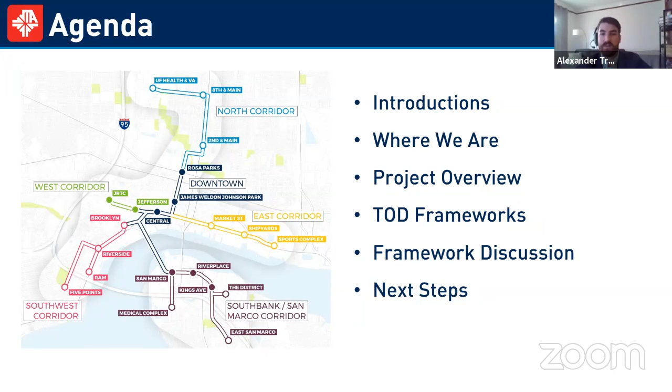We just want to give you a brief background of the status of the project and what we've done to date and where we're going. Then we'll dive into some of the frameworks that we've discussed and come up with as a team, and get your feedback and thoughts on what you think should be in these frameworks. From there, we'll cover the next steps of the project and give you an update on the timeline.

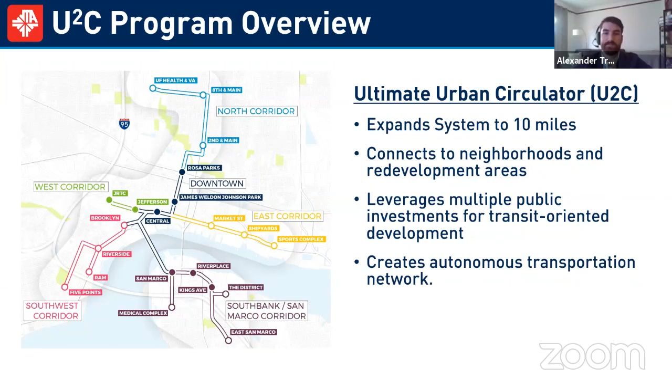As we dive into these frameworks, we really want you to consider what is TOD, or transit-oriented development, and think about all the features that make a TOD. TODs are a mixture of housing, office, retail, and other amenities that create a live, work, and play environment. It's a more sustainable form of development, focusing on infill development, as well as creating a safe environment for all travelers, including those walking or biking, as well as transit users. So we'll talk about accessibility, mobility, and sustainability.

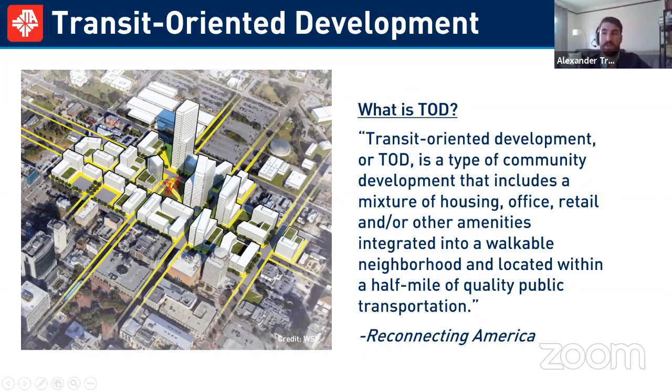All of these stations are surrounding proposed U2C stations. These have been developed in high-level planning exercises and are not definite station locations. If there are any other questions related to the specifics of the U2C program, for the sake of time tonight, since we'll be doing a lot of sketching and planning related to the station areas, we ask that you visit our project page at u2ctod.jtafla.com, and under the resources tab you can find frequently asked questions, which should answer a number of your questions. If you have any further questions, feel free to reach out, but I will do my best to address them in a timely manner tonight.

The purpose of this is really to improve mobility. Transit-oriented development has the opportunity to create more accessible areas for all users by creating nodes throughout the transit network. This will also lead to development of the economy or economic opportunity in the area, allowing this community to be more sustainable and support itself as well as the transit system, leading to a more financially sustainable form of development for the city and JTA.

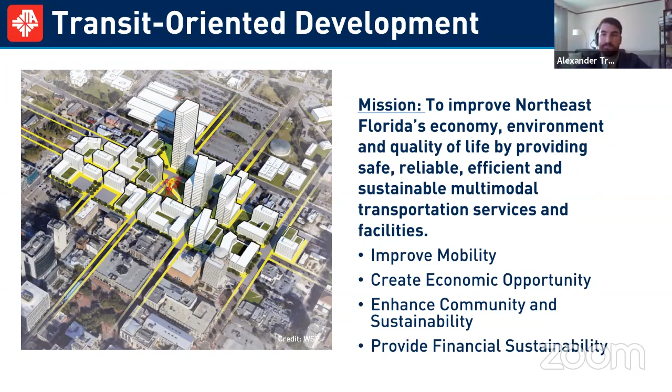Okay, great. Thank you, Zan, for that introduction. Again, I'm Josh Turner, the urban designer on the team. So tonight, the main focus of our discussion and our engagement will be

for our TOD frameworks that we've created for 6 stations. Tonight we're talking about Shipyards, Rosa Parks, and JRTC. How this will go is we'll talk about each station individually, first talking about the framework itself, which we've broken down into 3 pieces or 3 layers. The first layer is circulation.

The second, we layer on the open space network and public realm discussion. The third layer, we bring it all together within a transit-oriented development framework. You can't really begin to realize where possible development is going to go unless you understand the concept and priorities for circulation, connectivity, and also your public realm and open space.

After talking about the framework and breaking it down into that detail, we'll show some examples, precedent imagery that represent best practices for different approaches to TOD development, or specifically to the framework. So precedents as they relate to public realm and open space, and then also the type of development that we think could be appropriate for these different station areas.

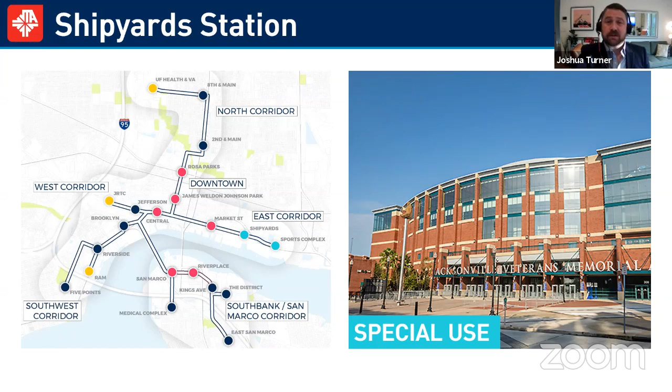Private land or parcels in private ownership could certainly be considered for TOD, but usually publicly owned parcels are something that can prove beneficial as far as getting projects off the ground.

We also note that the Shipyard station area does have some environmental issues, and this could be also the reason why this very valuable piece of waterfront has yet to be developed. So it's something that we acknowledge, and it's part of the narrative that we're building for this station area.

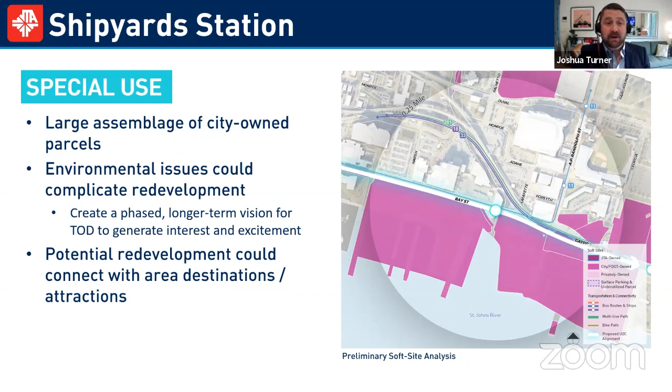And also, this station area provides a critical link between the sports complex to the east and also the downtown area to the west. So it's not only a very valuable piece of waterfront, but also provides that critical east-west link as part of the downtown story.

Some of the design principles that are important to this framework for circulation: first, really realizing what an asset this could be in the greater context of the Jacksonville Riverwalk network. We believe that any plan, be it parks and development, should absolutely emphasize and prioritize a generous pedestrian-only promenade right at the waterfront, and that goes a long way to reinforcing that east-west connection between the sports complex and downtown.

In addition to that, you want to be able to connect to the shipyard's waterfront, and connect to the park if there's going to be a large destination waterfront park there, which we think makes a lot of sense for something like that to go here. So creating and reinforcing those connections upland is very important, and we think these are pedestrian connections.

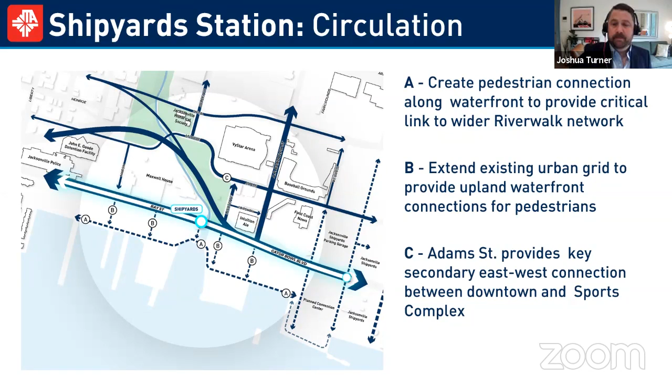So layering on top of our circulation framework, I want to talk about the open space network, really building upon that connectivity and also adding important places for, most importantly for this station area, new places to recreate.

So with A, again, we think that along the waterfront there should be a generous waterfront promenade. You can think of this as being 50, 60 feet wide, perhaps in some places even wider. But really it's more than just a waterfront trail—it's an entire, you could think of it as a linear park along the waterfront.

Here is the whole story of connecting to the Emerald Trail and Hogan's Creek. We think that's a really exciting connection that starts to not only land Shipyard Station within the context of downtown, but really Shipyard Station within the region, providing a regional connection via open space to the waterfront. Connecting to the Emerald Trail, we think, is absolutely critical, and it plays an important role in our ideas for this station area.

Then you've heard me mention the idea for park space at the waterfront. We think that's extremely important. There seems to be a lot of opportunity to provide a significant signature open space at the waterfront to really capitalize on that access to the water, and also just provide Jacksonville with a high caliber, high quality open space. We think that can take a lot of forms.

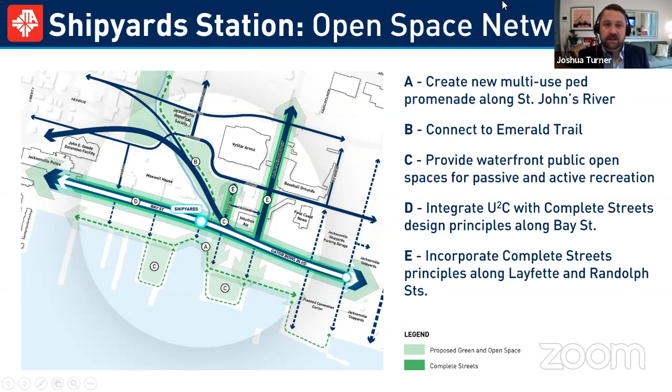Finally, here on the open space network is E, incorporate complete streets principles along Lafayette and Randolph. Again, that supports the idea of the upland connection. So not just the intersection at Bay Street, but think about attending an event at VyStar Arena or going to a baseball game. If there's somewhere to go at the waterfront, you want your experience along Randolph or Lafayette to really support an enjoyable, safe, and optimized realm for the public to circulate between the waterfront and these destinations to the north.

So we talked about circulation. We layered on our ideas for open space, the public realm, and that sets the stage for: are there opportunities for there to be development associated with a premium mode of transportation coming into this area and along Bay Street? The whole idea with TOD is really leveraging that investment in transportation infrastructure, and they both work together to put forward an idea of walkability, transit-connected places that also have a compact and sustainable approach to development.

Just to run down a couple of the ideas here that we have for Shipyards. You'll see A here. So we still have everything in place. We have the large waterfront promenade, and the high caliber destination waterfront spaces just to the south of that. We think that associated with this new open space, we could be very strategic with development and create a mixed use waterfront district that's integrated with this new park.

Right now in this scenario, we're showing, in this darker red, two new pads, if you will, or two new parcels for mixed-use development, and we think it should probably be multifamily residential. Maybe it's a hotel that complements a proposed or possible new convention center in the area. But really, you can think about the ground floors and maybe multiple levels being terraced and really opening up to the water.

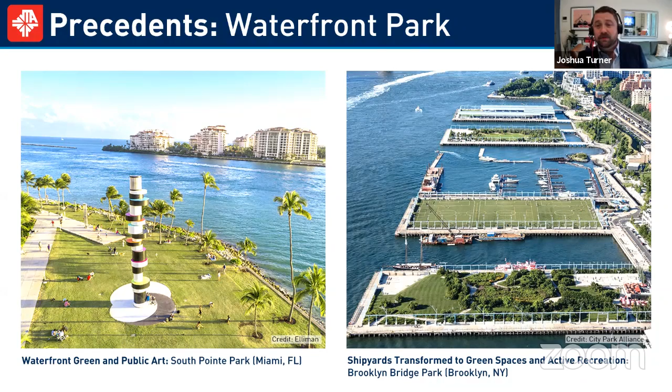So we talked about what our ideas were for a new park at the waterfront. We think it's something that should be high caliber, something that garners national attention, and also has high quality and very good landscape design.

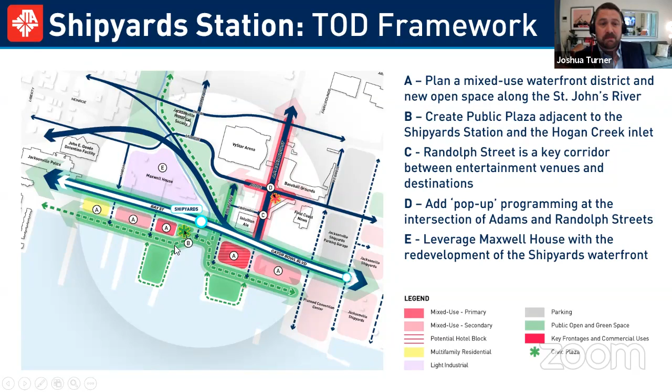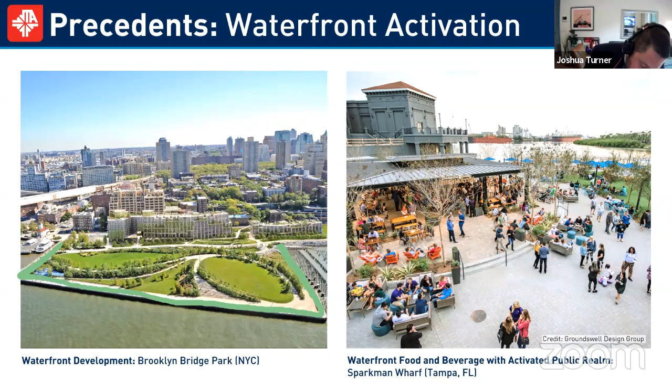This development was built in conjunction with the park. There's a hotel here at the end, and then these are residences. This is one way development can be very strategic, integrated very seamlessly with new open spaces like at Brooklyn Bridge Park. But maybe most importantly, these buildings are actually paying for a good portion of maintaining this park, and understanding where those funding streams come from is very important.

So we think it's a very interesting precedent. We also like the fact that it doesn't have to be towers at the waterfront. I think these range in height maybe up to 10 stories. So development done right can live very nicely among new open space at the waterfront.

The image on the right here is in Tampa, this is Sparkman Wharf. So if you think about the waterfront promenade and how different things could be going on, you can think of this building as being part of that development program. You have restaurants and bars and kind of the activation opening up to, in our case, that promenade space. We think this type of activation is meaningful; it gives a lot of different opportunities for what you can do at the waterfront.

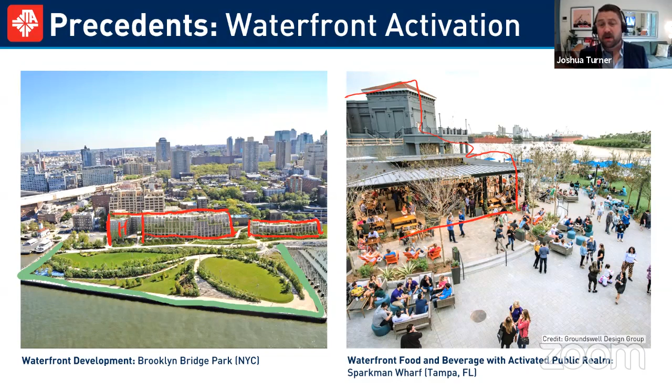Maybe that's a little bit different story than what's happening at Metropolitan Park. So that was our primary discussion for Shipyards, or at least the discussion of the frameworks. Before getting into this aerial and dropping on some of those elements, I wanted to open it up and check in with Zan to see if we had any questions or comments come in about the frameworks about Shipyards.

Sure thing, Josh. So I saw a couple come in regarding zoning in the area. The DIA and the city worked recently to approve the new downtown overlay, which really helps simplify the zoning, and a lot of the features within that zoning overlay are actually really supportive of TOD. So we are comfortable with the zoning in this area for all of the things that we are proposing in this vision.

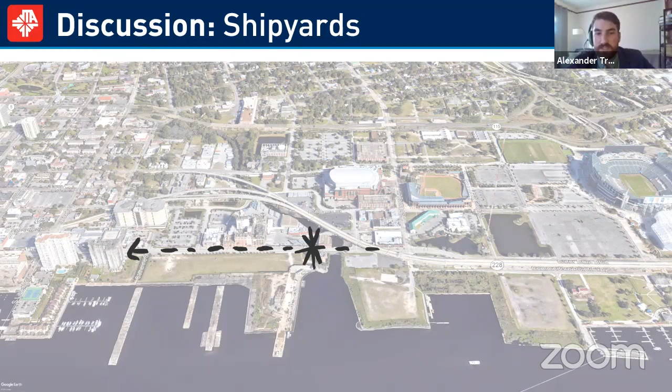As you start drawing that network there, Josh, some of the questions include connecting the Riverwalk that exists along the north bank through the Shipyards area to the stadium. Can you touch on the promenade and how that would connect? Yeah, absolutely. It's one of the first things we thought of when thinking about this station area. It's one of the most important ways this area helps fill in the missing piece of connectivity between what sometimes feels really far to the east, which is the sports complex, and of course downtown.

So I'll actually sketch in that waterfront promenade here. What I did was drop in, as Zan was talking, the planned U2C alignment along Bay Street. I indicated here at this asterisk the planned station at Shipyards, and I also dropped in the idea of some station being integrated with future development at the stadium. And just to touch on that, Josh, real quick.

So, yes, utilizing Bay Street, but the actual route into the stadium area is being designed currently. Again, this is just a planning level sketch of that area.

So the green line I'm drawing now traces the waterfront, but the idea here is that on either end, however ultimately the parcels around the stadium are developed, we believe there should be a waterfront connection connecting in with the existing Riverwalk network, both to the west.

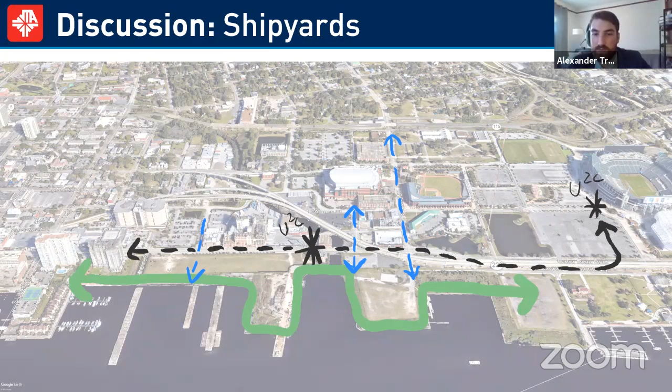So addressing these parks, they aren't really there to work as a swap for Met Park. This vision is really just determining what we feel is a good use for the area as it relates to transit-oriented development. And again, more park space is actually beneficial for the waterfront, helping with a lot of the resiliency issues that the city is facing currently.

Yep, that's right. So you can think of the new spaces at Shipyard Waterfront to be among the collection of open spaces throughout Jacksonville. Most immediate would be Met Park here. So it would be building upon the open space network within Jacksonville.

And of course, the Emerald Trail and Hogan Creek, as I was talking about earlier, that connection plays an important role with our planned station area, but then also connecting you to that waterfront.

Something else I just dropped in, these blue arrows are those upland connections. So dropping in one along Randolph, connecting the baseball stadium, VyStar Arena, Intuition Ale, providing that connection to the waterfront. We also think Lafayette, just to the west, is an important one. And then also just other areas to connect to the waterfront to the west. So we have one along Market, and then also maybe adding one that's more closely associated with Maxwell House.

So dropping in here, what I want to do is highlight where this new park should be. And again, we're very early on in the planning, and what we want to put forward as part of our vision is to help guide the discussion of how the vision for Shipyards takes place.

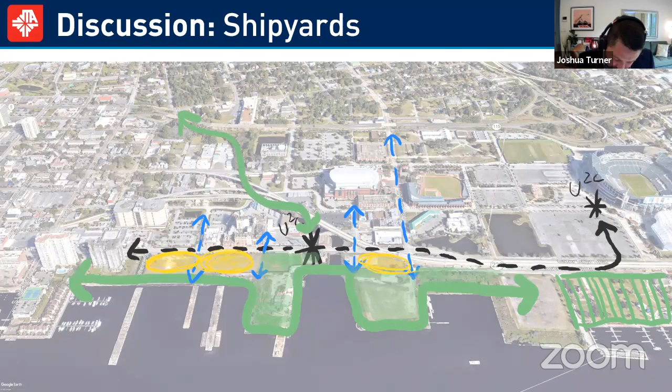So we have kind of VyStar Arena, we have the baseball grounds, we have Intuition Ale Works, we also have the stadium over here, and actually, to a bigger degree, really sports complex. And then also downtown to the west. And as you can see, Shipyard Station falls really right in between here and is really key.

I want to point out a couple other things because it's a part of the neighborhood. So we have the detention center here. And as part of our planning process, we don't think that's going anywhere. It may, but for our purposes, it's living within the context of the planning work that we're looking at for Shipyards.

And then we also have, I believe that building now is down, but are there, just to extend, is there an opportunity here? And then also maybe adjacent to Maxwell House, to maybe push the idea of some of this development to occur north of Bay Street.

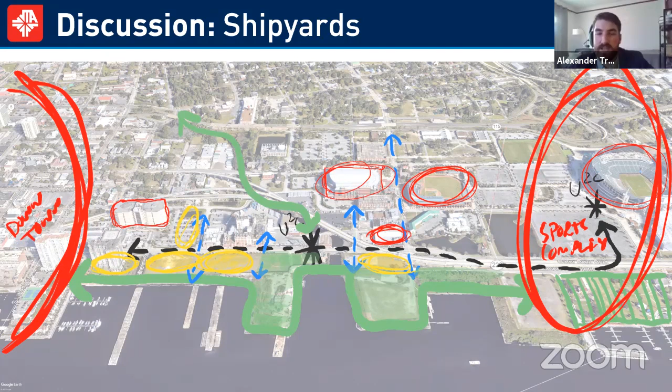You highlighted a lot of the kind of connecting areas there. So Shipyards, in a sense, is sort of a transitional zone between a highly focused entertainment area and the traditional urban core downtown. What kind of features can we include in this plan that will act as that transition zone, but also make it a destination in itself?

I think we don't have to come out and say Shipyard should be an entertainment destination for the region, but it can have elements that act as a draw. We think there's a real opportunity to complement, even before the sports complex gets fully built out, the existing entertainment amenities in this area—the stadium, the arena, the baseball grounds—we think those are destinations in themselves.

So could these yellow circles be mixed use development with restaurants and bars that could complement people coming to a game or an event? Is there an opportunity to keep them in the neighborhood, whereas normally they might immediately leave once the event or game was over? Is there an opportunity to, before or after the game, walk down Randolph, walk down Lafayette, and all of a sudden you're in this new waterfront place?

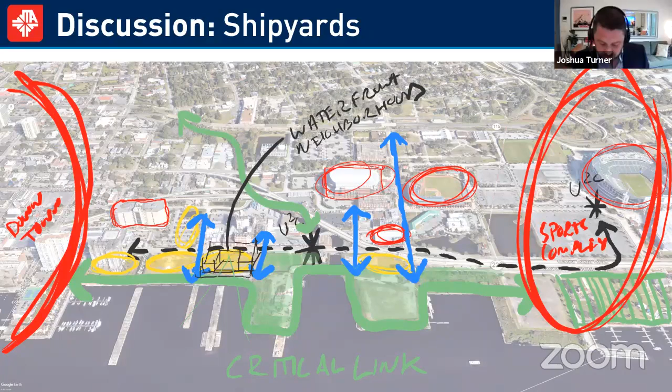Really key to thinking about Rosa Parks Station and our thinking for transit-oriented development are the First Baptist parcels. We have one of the older auditoriums here on the left, and their parking garages. So really, the future of those parcels and how they play into a new vision for the Rosa Parks Station is important.

As a topology, Rosa Parks is just north of downtown and certainly part of the central business district. But when we were assigning the topology, we weren't necessarily thinking about what it is today, but maybe what it could be in the future, when you have the expansion and transformation of the Skyway to the U2C. So we think it has an opportunity to be a high intensity urban center that's really acting as an anchor for the north part of downtown.

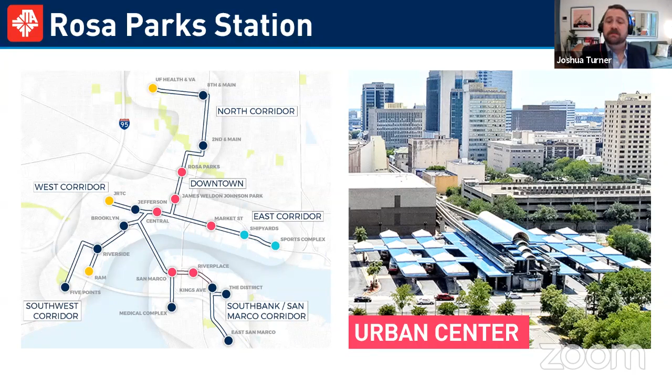So when we think about Rosa Parks, what could it ultimately look like in, let's say, 15 years? But you have to start somewhere, and we think the parcel actually owned by JTA is quite large. It's where the station is, so we asked the question: could this be a phase one project that could be catalytic for the larger station area, and really help inform and set the tone for how the Rosa Parks station can be fully realized.

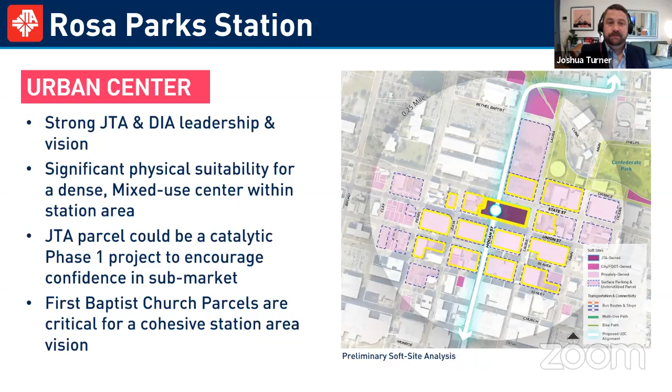Similar to how we did with Shipyards, we'll talk about Rosa Parks Station in its three layers. So first here for circulation, with State Street and Union Street - these are really important corridors to get people in and out of downtown. So we don't see that changing, but what we would like to see is, in and around the station area, are there ways we can introduce traffic calming measures to promote pedestrian safety and circulation?

If we're wanting to create a new place here where one does not exist now, this is one of the things we always ensure is part of the planning process. At least the idea is put out there for discussion with the hopes that it can gain some traction. So we think that's definitely very important right in the immediate station area, getting people from the station to points south or even points north.

With Hogan Street, this corridor, we really like the ideas being put forward by the DIA for this being a corridor of local restaurants and bars, and really being a place where people go. So you can think of downtown not just as a 9 to 5, but maybe it could be an 18-hour district. You've heard of a 24-hour district, so maybe this is an 18-hour district where people are staying through the evening or even on the weekends, coming and visiting and patronizing restaurants and bars that make a name for themselves downtown.

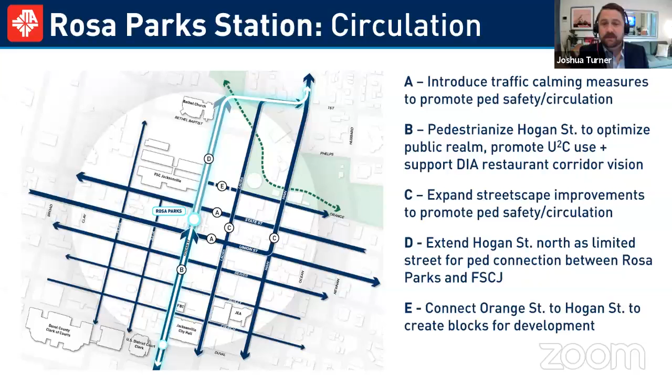Well, this is more about the experience—so adding enhanced lighting, maybe benches, trash cans, places for bicycle lanes and bicycle stations. All of those come together to really reinforce and optimize the experience for the pedestrian.

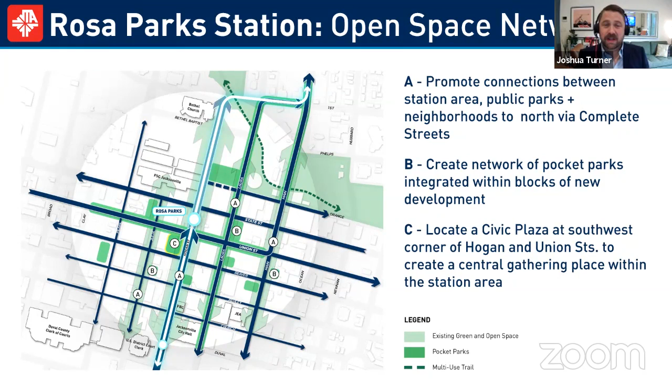So among all the stations we're looking at, certainly Rosa Parks is, I would say, the most intense. Also, I think the one that has the longest time horizon as far as fully realizing the vision of what the station area could be. But we do think there's real near-term opportunity in those blocks right around the station, actually on the station, and then of course the First Baptist blocks.

Perhaps there's an opportunity to have another hotel downtown. It would be great to have some more options to stay. The Omni and the Hyatt are great, but it would be great to have different options throughout the downtown area when visiting.

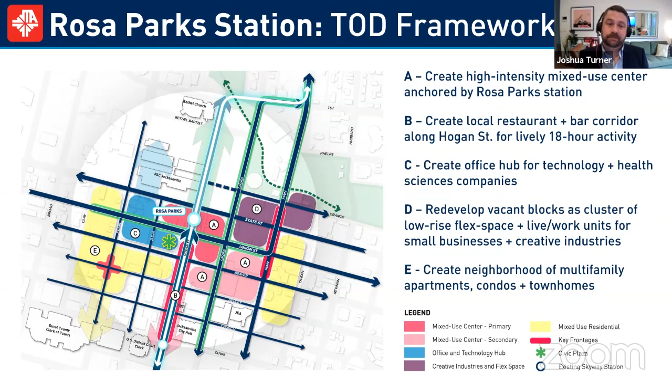So what does some of this stuff look like? We look to Florida, specifically Miami, also Tampa.

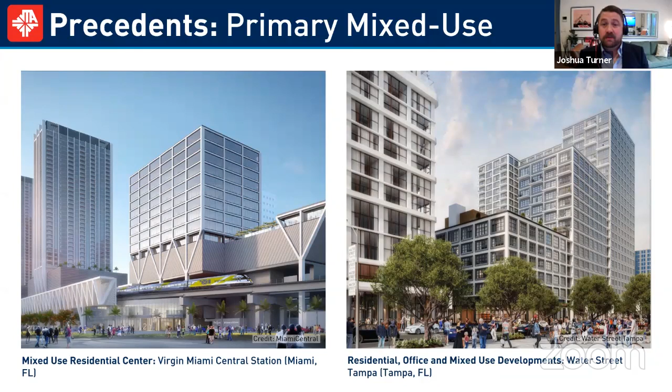I also want to point out, the planning for this new neighborhood does a great job optimizing the public realm, merging it and making it a place for the pedestrian alongside this new development, so it all coexists. It really makes for a nice place, and these images speak directly to that.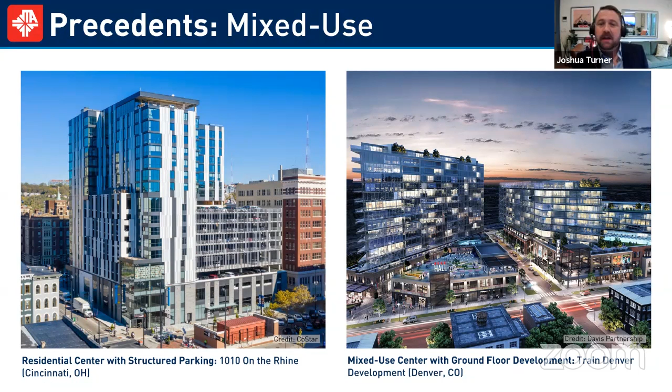The image on the right is a bit more mixed use—whereas the building on the left is residential, this has activated ground floors. Imagine this at the Rosa Parks station: the station is perhaps back here, or maybe coming right through, and so it's that more intense mixed use development, the culmination of that Hogan Street or downtown restaurant scene—really a place to go, and anchoring the station itself.

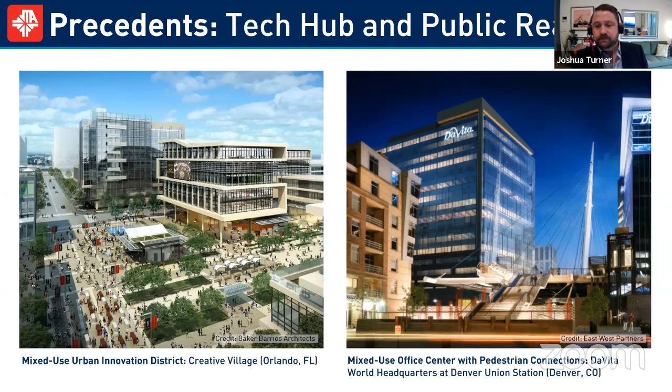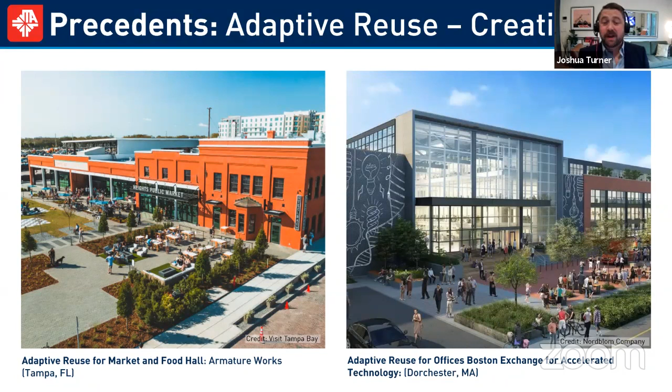Over here on the right, again, it's a building that's been adaptively reused, this time for offices. So when we're thinking about creative office spaces and live-work environments, it doesn't all have to be new construction. It can be creatively, or strategically, reimagining existing buildings.

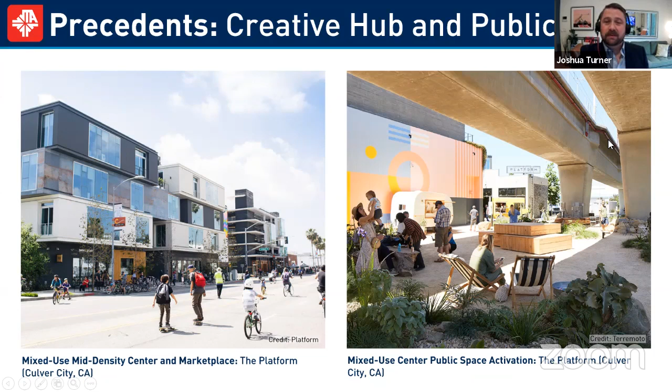As you can see here, still in Culver City, you can think about how, if this was the Skyway above, or what will be the U2C, this space below could be activated. If Hogan Street is pedestrianized, with restaurants and bars mixing with maybe a landscape or open space network, I think it makes it really dynamic with this transportation infrastructure.

So before we get into sketching some of these ideas over Rosa Parks, I want to check back in with Zan and take a look at any comments or questions we've had come in.

Not many coming in, so I'll take this opportunity, as you start to draw the mobility network, to open this up to any participants on the meeting right now: if you were to live down here or in downtown, what features do you feel are missing, and what do you think are essential services to making this a place you would want to go? You can enter those in the comment box on the right or below your video, or on the map question for the Rosa Parks Transit Center.

All right, as those come in, I'm dropping in some of the elements here. So obviously I dropped in the Rosa Parks station. We have the existing alignment going south along the Hogan corridor, and then the new alignment going north along Hogan and connecting into Springfield up on First.

What I want to do in this one is go through and outline a couple of the key features here in the station area. We have currently the JEA building over here, an important local landmark. We also have the First Baptist Church, and this block, as the discussions are going now, will be remaining and serving the First Baptist folks. We also have an apartment building over here, and I might not get every single one, but I'm going to point out the ones that pop out as part of the station area design.

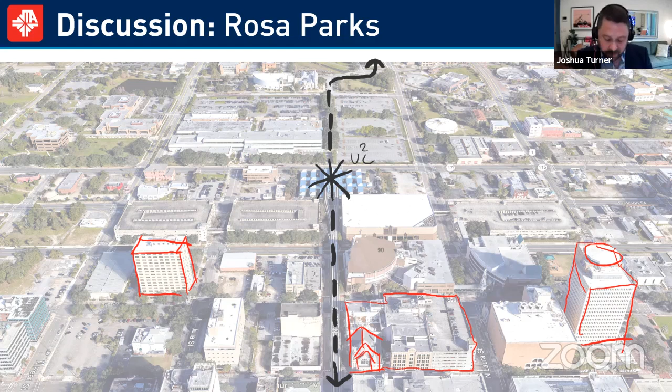We also have the university up here. Now I want to point out, well, actually I think what I'll do first is talk about the streets.

We have Main Street over here, let me get a little bit thicker of a pen. It's an important corridor connecting the station area to points northward, Springfield. A little closer in, we have Laura here, providing a direct connection to the waterfront.

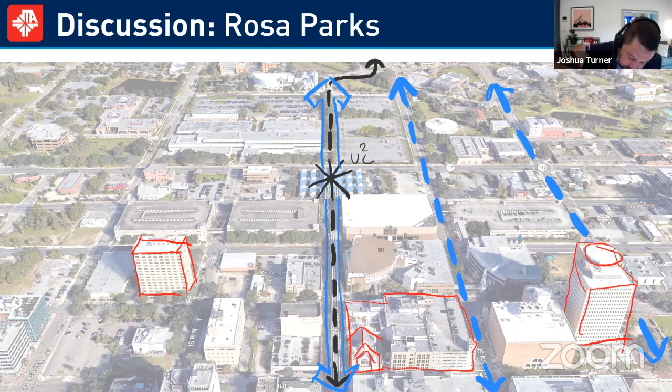Of course, we have Hogan Street, playing a central role in our station area. And then the idea of extending Hogan Street and really creating a multimodal corridor. And then we have Julia here, which is another—whoops.

So this is the process as we create our frameworks. The first thing we do is start tracing out what's existing now, what's critical, and what's the hierarchy of circulation within the station area.

So I'm going to drop in State Street. And then we have Union. Zan, did I get those reversed, or did I get them right? I think you got them.

Okay, so now we've illuminated our grid here, and I want to talk about the idea of complete streets and an enhanced public realm, which is very important as this station area comes into play.

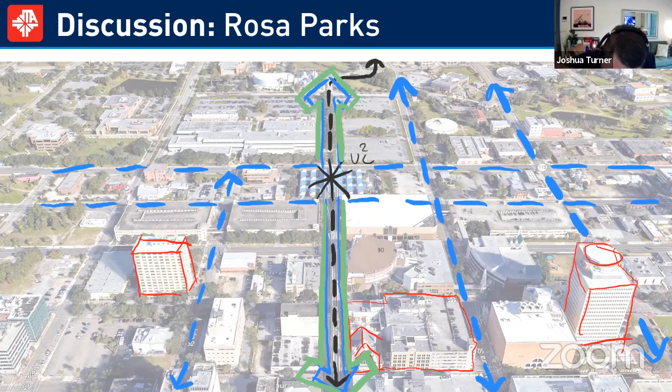But then we talked about earlier really making sure—this is State Street, correct, Zan? I just want to make sure I have them correct. Union is on the south. Got it, okay, I was feeling like I had those reversed. So this is Union.

So this is thinking about circulating from the station to points south, or even coming from downtown to points north. How can we create a safer environment, and are there traffic calming measures that can be done, especially along Union Street? Really, that's the interface between the Rosa Parks Station and downtown proper.

So now you're left with really the elephant in the room. You have these large blocks here where the idea is for something in the future to happen—these are the First Baptist blocks. Some are auditoriums, some are parking garages, but there are quite a few. With the current discussions, these would not be part of the First Baptist place in this part of downtown.

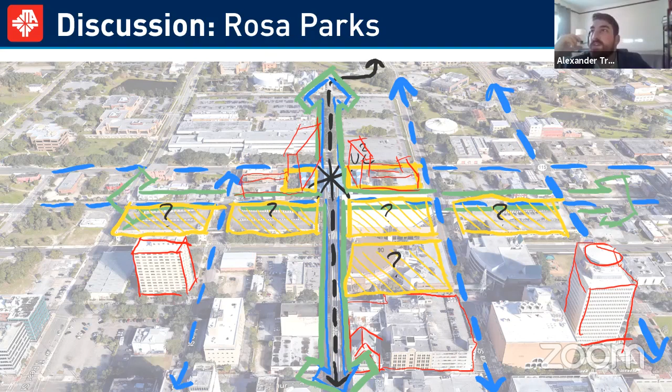Josh, as you draw those out—yeah—so just a few comments coming in. State and Union have always been major thoroughfares through downtown Jacksonville, and it seems there are no plans to reduce those lane counts; it's been a challenge. Can you speak to any traffic calming measures that might help alleviate that safety concern as you build out this destination?

Could you utilize things like signal timing, or even activating the street side there to slow things down? We still think, as discussed before, these two streets play a critical role in the larger vehicular network for Jacksonville, and that will continue regardless of what's here. Is there an opportunity, say between Pearl to the west and Main Street to the east, to tighten things up a little bit and slow things down?

So I think you hit on one strategy—timing with lights. Also putting in a very clear crosswalk, or maybe new medians or an island, so there could be a bit of a road diet. Not necessarily taking away lanes, but tightening things up and giving different options for people to safely cross what is normally a busy, fast-moving street. We also think landscaping, lighting, and wayfinding can all work together to really improve the situation and support this being a place that's both on the north and south side of Union.

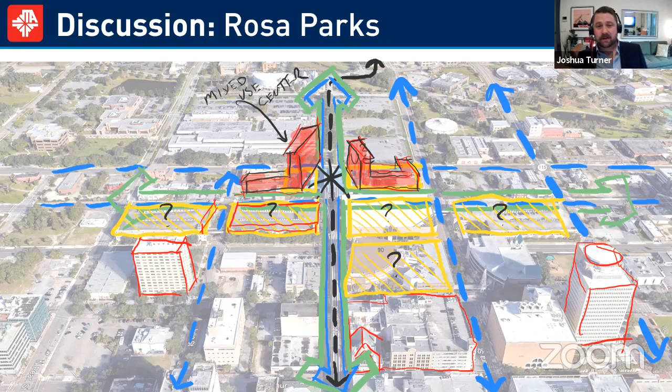How can we think about the longer term? There can be really smart ways to think about this garage or these existing garages. You could think of it almost like a park and ride — you park, then get onto the circulator, the U2C, and circulate through to different destinations, be it the Waterfront Park at Shipyards, or over to shopping at JRTC, or up to Springfield for brunch.

What I will add is, before we leave Rosa Parks, I want to build out this block here really quickly. It's that idea of a new civic space, helping anchor and create a central gathering place for this new development, and also our idea of there being some type of office hub or tech hub associated with the university or with health sciences.

As Josh is drawing in these last features, if there's any final thoughts you may have on what you would envision for this area as a gateway between Springfield and downtown, please feel free to share those in the comments or add them to the map questions, and we'll be sure to incorporate these into our framework development.

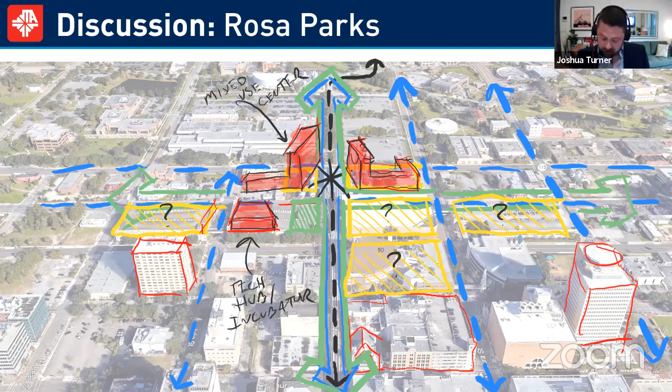Sounds good. Okay, great. So what we'll do is move on from Rosa Parks, and go on to our last station this evening, which is JRTC. So we save the best for last — but no, they're all great. This is an exciting place because of what we're seeing here on the screen.

Having opened in March, it will really be the catalyst to transform this entire area. I think it sets a fantastic example of how transportation agencies can be a role model for economic revitalization and promoting smart and sustainable redevelopment and new development.

So to talk about JRTC as it relates to the work we did leading up to our frameworks — we think the JRTC station is certainly a regional center. As we talked about before in our previous engagement, a regional center can be a place of employment, like a university or UF Health, a place for healthcare providers. But in this case, we think it's a regional center because it will be the epicenter and hub for regional transportation for Jacksonville. It's right now there today, weaving together the existing Skyway with the bus network, with more to come.

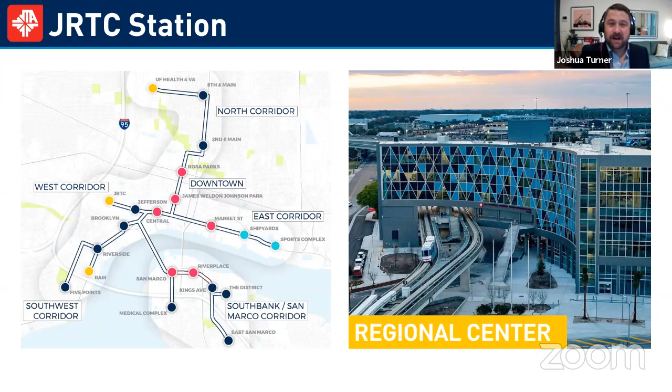Just some of the things we observed which make us excited about this station: similar to Rosa Parks, there's strong leadership to promote a TOD vision, coming from the JTA and also the DIA. There's also, in this immediate station area — as you can see here, a quarter-mile offset — a concentration of JTA and other publicly owned assets, in addition to vacant parcels.

So when all that comes together, you have an opportunity to have more control over those initial, hopefully catalytic phases, and really kind of setting the tone for what could come in the future.

There's also things going on in the La Villa neighborhood. In addition to JRTC, there's already a proven track record for multifamily development occurring right now in the station area. You have the lofts at Jefferson Station, and new developments further north of Adams. What's great here is there's already a precedent for providing for a range of demographics and economic levels, a mix of market rate housing with workforce housing, and we think that mix is extremely important.

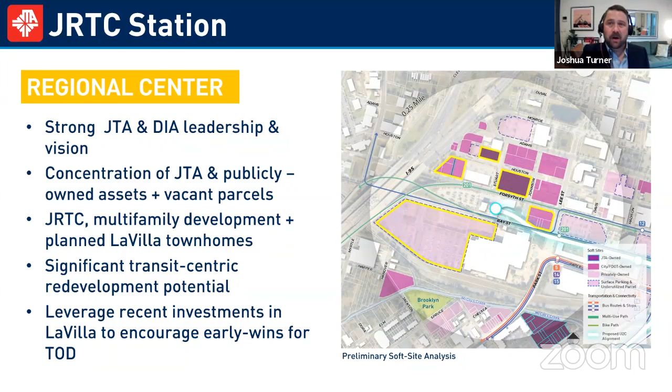All of this builds up to really leveraging what is happening now, and building upon that momentum to keep moving forward and realizing those early wins. Again, it always comes back to those catalytic projects and really increasing that momentum.

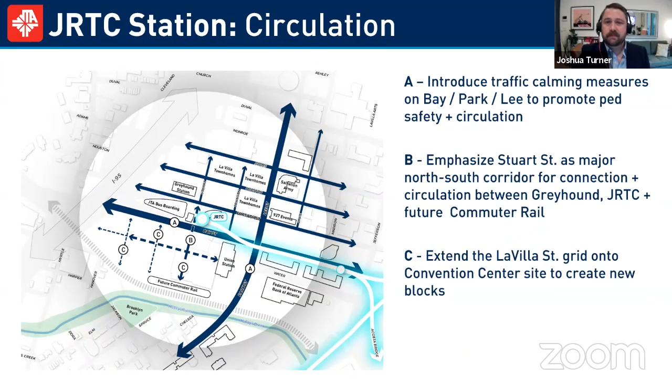Adding on our open space network, or our green layer, just like we've talked about in our other stations, we want to incorporate complete streets to really reinforce the connectivity within the station area, but then also connections to adjacent neighborhoods. We think Park Street feeds right into Brooklyn, and there's Riverside Avenue, which is part of Brooklyn and Riverside. But we think Park Street, it's not so obvious, but it's really a critical key connection between La Villa and the JRTC Union Station, or Jacksonville Terminal area, all the way down to 5 Points, with Brooklyn and Riverside falling right in between. So the whole host of complete street strategies plays into that connection and reinforcing that.

Like we suggested at Rosa Parks and also Shipyards, we think that with any new development, there should be a new open space, and these can all be different. It's not like we're suggesting the same type of place everywhere. So for JRTC, we think this is a civic plaza that really celebrates transportation, showcases the JRTC, but also really brings Jacksonville Terminal and the legacy, the history of transportation in the neighborhood, into the fold. And also, as you'll see on the next slide, another gathering place for the new development that could take place in this station area.

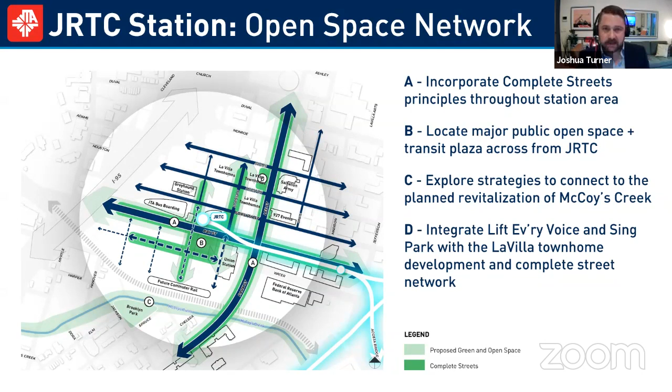That's a great point, one I was about ready to miss, because for this station more than others, there's just a lot of opportunity to provide meaningful connections to different places. There's planning work currently going on for McCoy's Creek, it'll come up in our framework discussion, but how can you tap into that regional open space network? It really helps land this area from a connectivity perspective.

So bringing that all together, how does our circulation and open space network lay the foundation for a TOD framework? We'll go through a couple of our main ideas here. So on the grounds of the existing Prime Osborne Convention Center, the Jacksonville Terminal Head House is something that absolutely stays.

We would never suggest that it goes away, but we really allow it to take its former glory as the centerpiece for the area alongside the JRTC. We think this is a new mixed-use center, a neighborhood first, but then there's opportunities leveraging the connection to transportation, be it future commuter rail, the U2C Skyway network, the bus stations, or Greyhound.

There's some mixed use, some restaurants, maybe some retail opportunities, and it's really focused around that new civic plaza I was mentioning earlier. You can almost think of it as a living room that has the new neighborhood on one side, Union Station as another side, and then the JRTC framing it to the north.

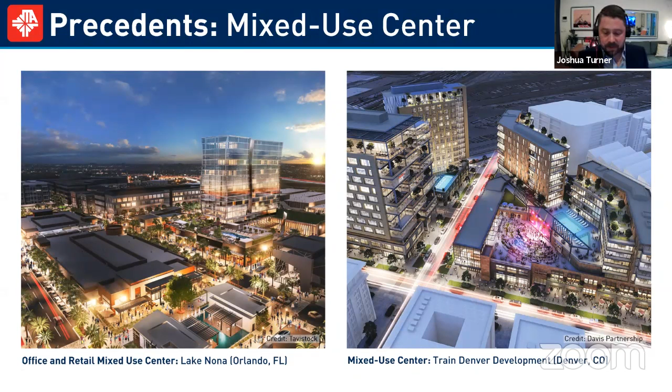So what does some of this stuff look like? This is Lake Nona in Orlando, an example of an office and retail mixed use center. Maybe not office or a total retail destination, but what we like is that it's generally a low rise district. You have a mix of 3, 4, 5-story buildings, but then maybe a single building that really acts as a signature building that anchors the new mixed-use center.

And you can see this signature building being among the JRTC and Union Station. So the new development has its own representative signature building that is among the other two really important buildings in the station area. But it doesn't have to be an entire swath of new towers — we don't think that's appropriate. La Villa is first and foremost a neighborhood, and we want to create a new neighborhood center here that's served by a regional transportation network.

We saw this image for Rosa Parks. We're showing activation of rooftops here. We think that's important because in this district there's going to be garages within the new development, and so there are opportunities to create a public place, but also more likely amenities for the new apartment buildings that will be going into the area.

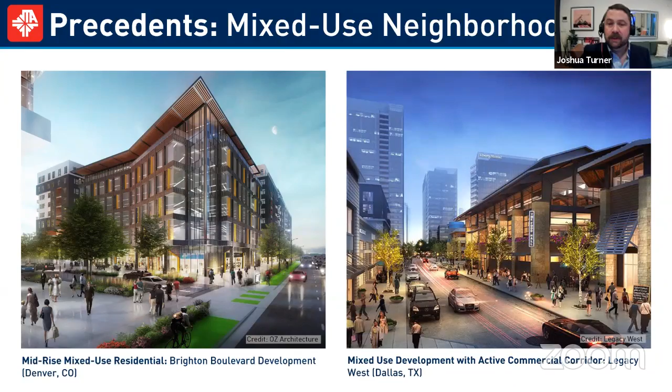The image on the right is from the Legacy development in Plano, Texas, just north of Dallas — a large mixed-use development. Here the idea is maybe there's a pavilion or a single-use building that could hold events, maybe a food hall. So it's how we're thinking about that programming, giving different options for how this new area could serve as an anchor for both the immediate area and a destination for the city.

Denver Union Station really has all the same ingredients that the JRTC in the La Villa Station area will have. So if commuter rail does come, Denver has that mixing with their light rail, which you can think of as the U2C or the existing Skyway, and then of course a robust and multimodal bus transit center. So there's a lot of similarities between the two.

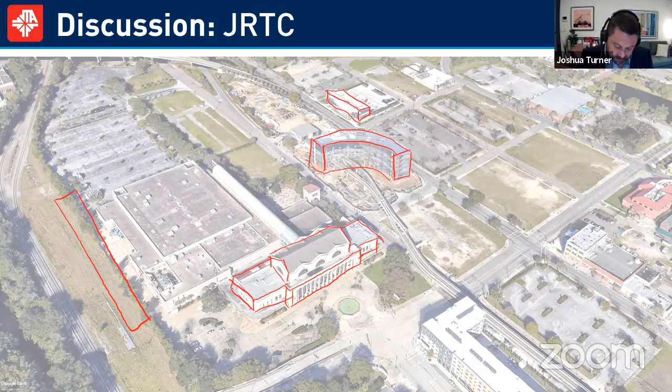Yeah, and I think it fits along with the ideas that you have for the area there. So what I'm doing is, since transportation is the key part of the storyline here at JRTC, and you really can't say it enough because it's really amazing what's coming together. So what I've drawn out here is the stuff we've talked about. So we have JRTC here.

That's a fat pen, let's see if I can bring that down a little bit. Then we have the Greyhound terminal. We have the future possible commuter rail, which would most likely be over in this part of the world. And then we have the Union Station head house, which would absolutely be hanging around for the new vision for the JRTC neighborhood.

Now, just going to clarify this a little bit. So again, this is really the backbone of the future of this neighborhood. Just going to give these a quick outline.

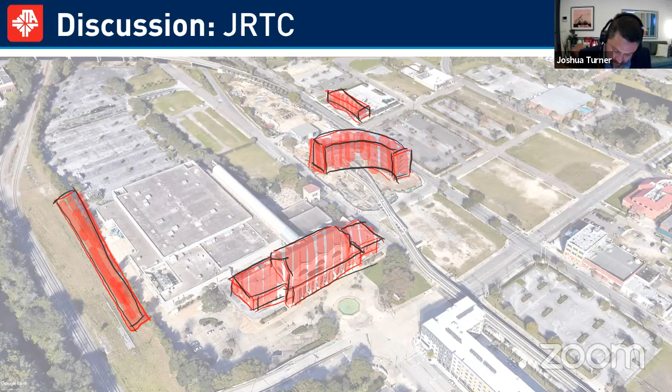And then we have some of the connections today. So we have our station. Then we have our existing Skyway, soon to be converted to U2C, heading to points east, most immediately to Jefferson Station, just to the east there.

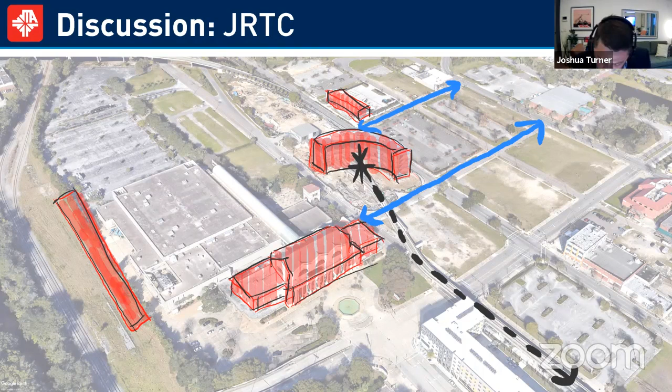And then also, I just want to point out some of the major streets here, going back to our circulation — what's the existing grid, how that really is the organizing structure for really any neighborhood or any place. So we have Johnson Street here. We have Stewart Street here, which now just stops short, or just north of JRTC. We have Forsyth, and then of course we have Bay, the major east-west streets.

And so this is where I was showing in the framework, but I'll draw it in — for this to all act together holistically as a regional transportation hub, you want all your elements connected. As they've done very well in Denver, they provide a wonderful, lively, active, healthy connection between their transportation assets. So I just dropped in a little jog.

It jogs a little bit, but the idea is Johnson Street continues through. This can be pedestrian, it could have limited vehicles, but I think it's the idea that it's the right of way — it's a public place, and it helps organize the area. So same thing with Stewart Street. Maybe Johnson Street's a little more of a priority in the hierarchy of connecting from JRTC over to commuter rail, but all that will reveal itself in the actual planning for things like this.

So now you can kind of see, even if Prime Osborn does go — and this older 1980s convention center piece, the add-on to the Jacksonville terminal — goes away, then you can start laying out additional blocks in this area. Actually it's quite large, between the surface parking lot and the existing convention center. It's a huge space that really does accommodate a lot of opportunity for new development, or for a brand new neighborhood.

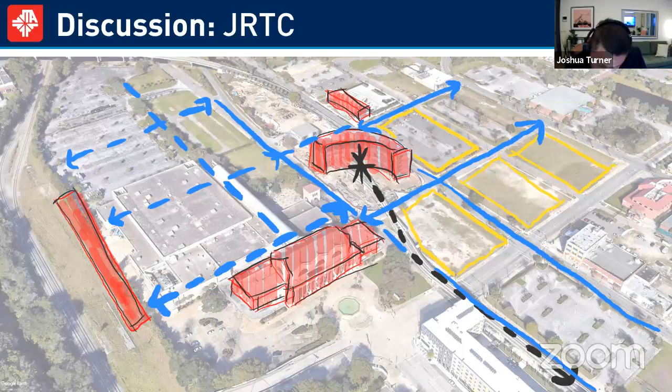You also have the townhomes blocks, which are being planned. And I just realized I forgot to drop in Park Street — that's a very important north-south street, as I talked about earlier, but I'll finish my thought. So these are the townhomes, and they occupy quite a large area of the station area.

So let me drop in real quick, Park Street. And really important, this connects to Brooklyn.

So just playing this out, we identified existing blocks where they are now. What are the blocks created with what we've just drawn over on the Prime Osborn? So you have one between Stewart and that new street to the west. You have one here, which is just across the street from the JRTC. And I do want to point out—

—the existing facade. Now, Zan, are you able to tell me what this was? Because it's absolutely a part of our thinking about the station area, this facade here. Yeah, I believe that's part of the historic fabric of the original station, located right there — there's one of the trains as well as one of the little towers there. Okay, great.

So as you can see here, whereas you have the convention center, now you have really a large opportunity to maybe, over a phased approach, really lay out this new district. Again, you can see how this new district is sandwiched right in between JRTC and future commuter rail, and that's extremely significant.

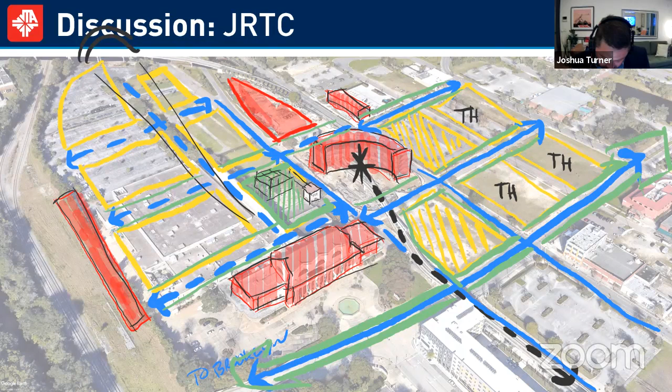I think, Zan, if I were to do one more thing, I might just drop in some apartment buildings here.

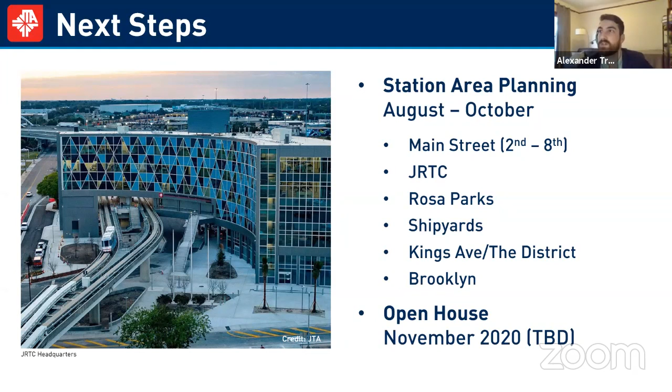For further information about the project, feel free to visit our project website at U2C.TOD.JTAFLA.com. There you can find tons of resources about transit-oriented development. Under the TOD tab, there are videos showcasing some of the benefits of it. Within the corridors, you'll find all of the content we're developing as part of the project that will give you more information on the specific corridors. You'll have the opportunity to engage in our survey under the Engage tab, as well as find resources related to the U2C program, as well as general transit-oriented development resources under the Resources tab. And again, if you have any afterthoughts, feel free to reach out through the Contact tab.

And it looks like we did get one other response in here. So let me do my best to read through this and see if we can tackle this. Oh, I see it, yeah.